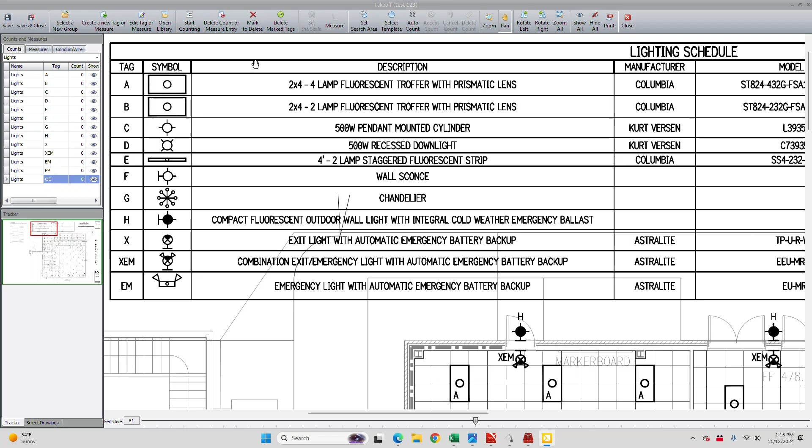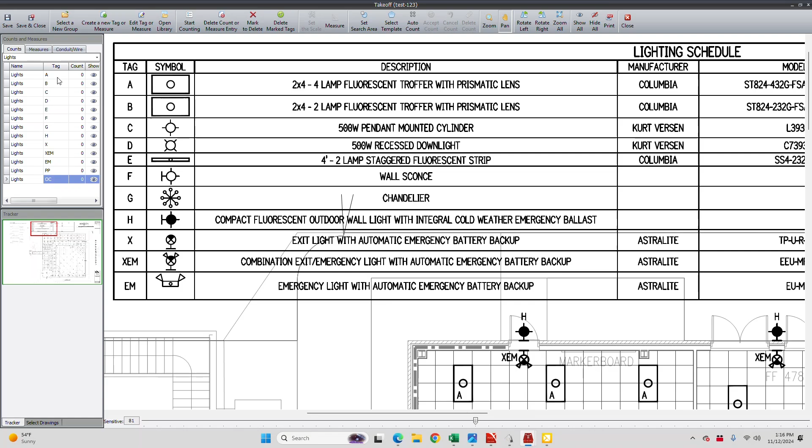The first thing I like to do is find the lighting schedule. A lot of people are confused about this, but it's just a schedule with what we refer to as tags. The tags just tell you what fixture you're going to be using for that tag. So we'll transfer these tags, A through EM, over to the tag machine right here. This is going to be your count and measurement viewer.

It's that simple, just transfer those tags, and anybody can do this. There's no faster estimating software on the market than the Best Bid, either the Hybrid or the Next Generation. They're both fantastic products, and I'm not going to count every fixture here.

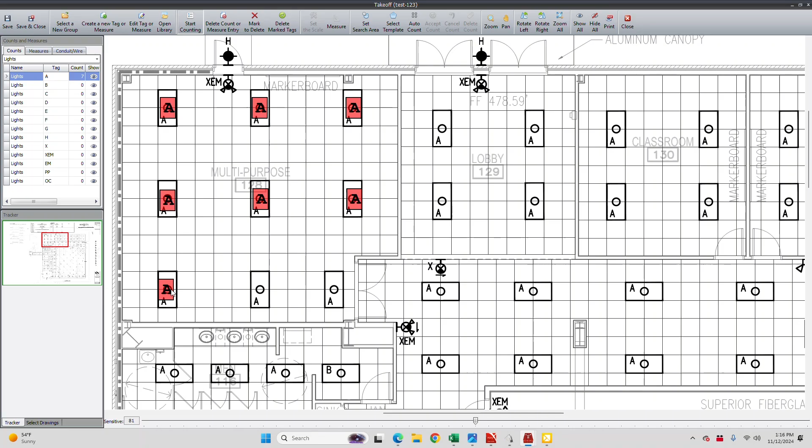It's just so simple to do. We're going to hit a button that says start counting. We'll highlight a fixture and you simply click A. It's that simple. If its color is counted, what I like to do is just get a view that I'm comfortable with, and I count everything in that view. I don't go around searching for all the A's, I just simply count it if it's in the view I'm looking at.

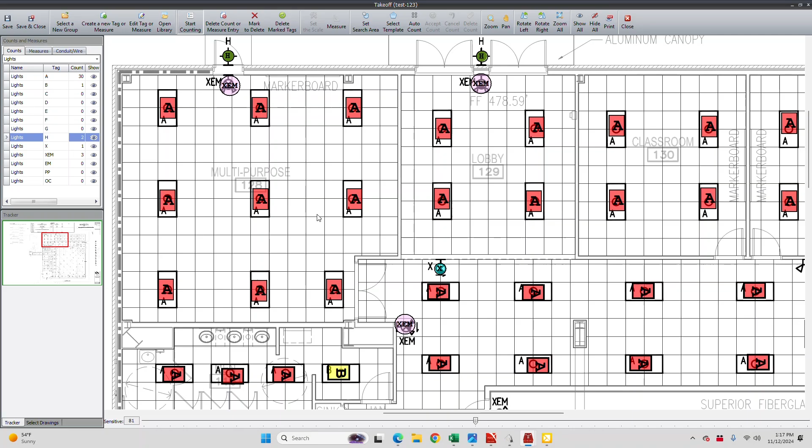It's very repetitive, like I said, anybody can do this. So we got an X, and an XEM, and an H. Everything is counted in that view. I just simply scroll to the next view and repeat the same steps.

You don't have to be an electrician to do this, anybody can count. It just keeps a cumulative count of every time you click.

But the beauty of the Best Bid software is not only how easy it is to count, but it's how you transfer your information once you're finished.

Also the beauty of this product is, as we're on this takeoff screen, I can see that these C fixtures are over pews, probably 30 feet in the air. So I'm going to adjust the difficulty factor for these.

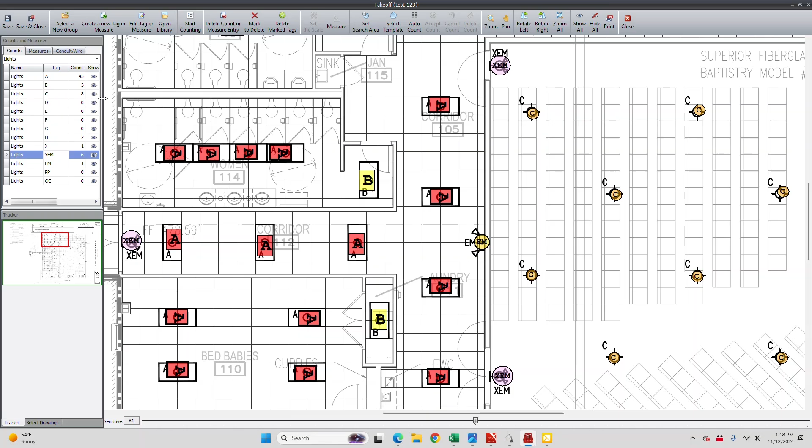If you leave the man hours at 0, it's going to give you your default. But I'm going to change these particular fixtures to 2 man hours, since they're going to be done in a lift. The others I'll just leave as they are.

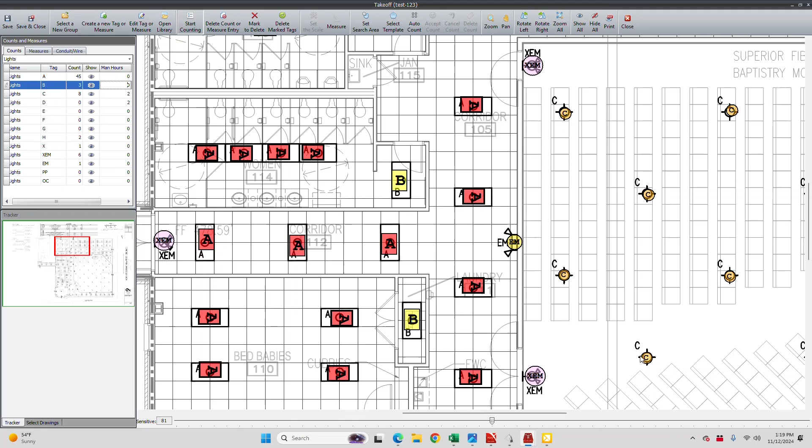Now that I'm finished with these counts, I've counted my entire lighting project. All I do is hit save and close, go to the lighting assembly, create a new assembly, add multiple counts. All I want to do is highlight all of them.

I didn't count them all, but I'm going to bring them all in. Hit OK, now they're in the estimate. Nothing can be simpler than that.

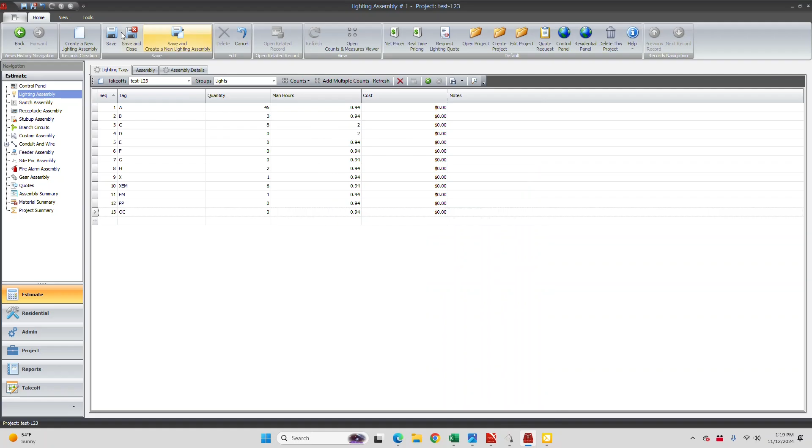Going to hit save and assembly details to see my results. So this is going to be all the boxes, conduit, couplings, connectors, seismic hangers, fixture installation, everything you need to do those fixtures. If you want to make changes, you go to the assembly button.

From here, you can change everything about any fixture: the strap type, the couplings, connectors, everything about it. The labor, you can change if you want flex, you hit add fixture whip. Raceway size, if you want a different size, just choose it. You want a different type, you want to go to MC cable. Everything's adaptable, everything's changeable, nothing faster, nothing easier.

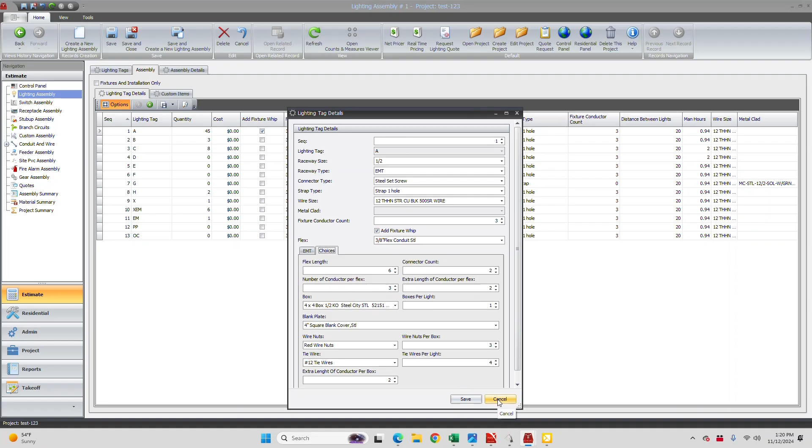You can even open up the option screen and go deep into changing everything about what's happening, but most of the time you want to just leave it alone. If the whole thing needs a difficulty factor, you can raise this difficulty from 80 to whatever you feel it needs to be.

Next, we're going to go back and start measuring. Okay, I've gone back and colored and counted all the fixtures in the drawing. I know you didn't want to sit there and watch me do that. It's pretty repetitive, but I now have everything counted.

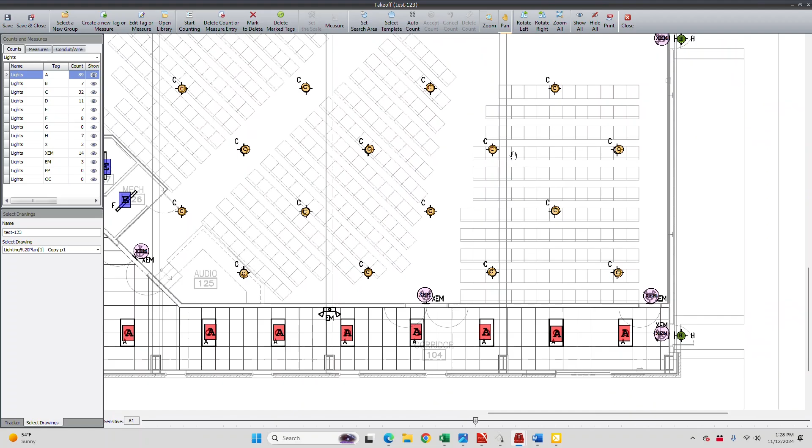Actually, I missed this EM. I was just kind of in a hurry, but it's easy to fix your mistake there. So everything is counted, everything's ready.

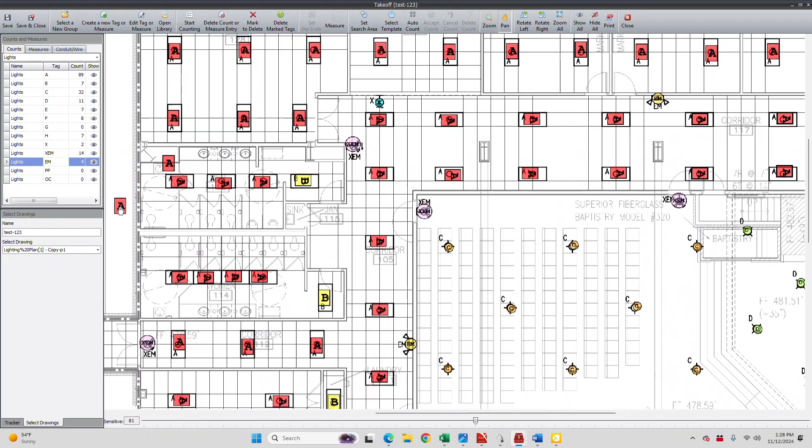Here's a mistake I put out here on purpose to show you how you would remove that. You put the X on it and click delete, that removes it. So now we have everything recorded.

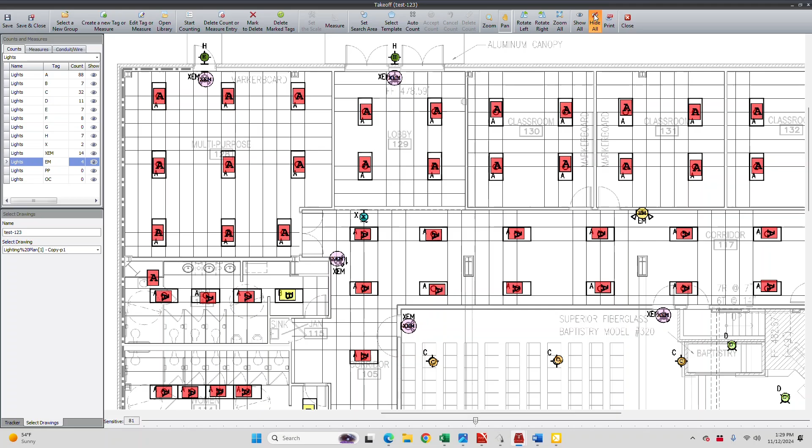The next thing you want to do is hide all the counts. Now I'm going to bring in a plan with the circuitry on it, and get the perfect view.

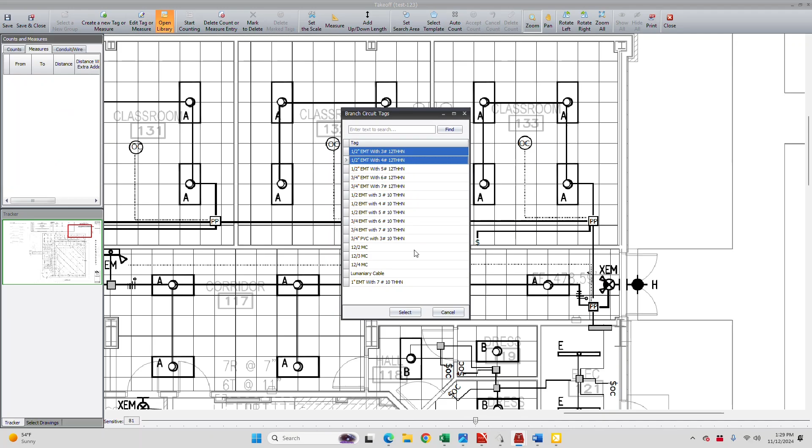I'm going to go to measure, open up the tag library. I'm only going to enter the top couple of items, which you could enter them all. This is going to be half inch with 3 number 12s, and half inch with 4 number 12s.

To measure, you just simply set the scale. I know this fixture is 4 foot.

I'm also going to add another one, which I just saw, which was going to be low voltage. I see some OC sensors here. So we will start with the half inch with 3. This should be pretty simple to do.

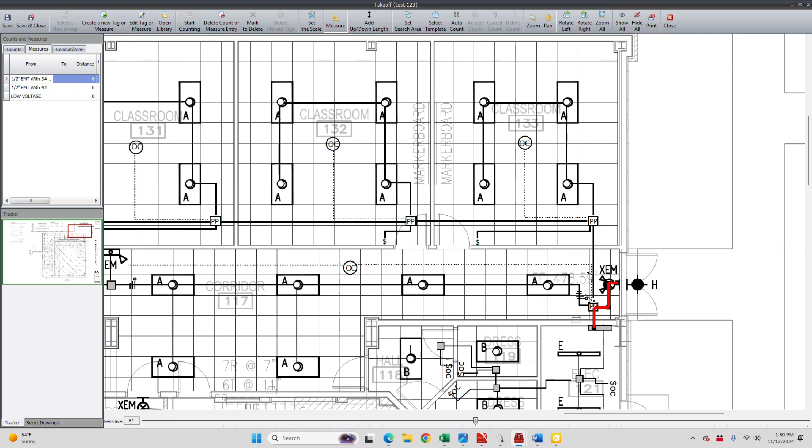So we're going to start measuring. We'll go from the panel to the power point, to the power pack. Now, this is not meant to be pretty, it's just meant to completely catch your conduit so you have a better guess than just guessing. So I'm just going to follow the lines. Again, this is simple to do as well.

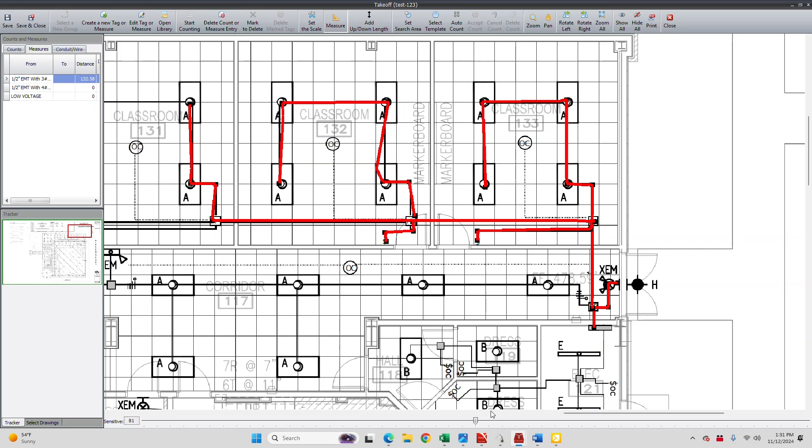I think you can understand what we're doing. We're just catching all of the circuitry that has hot, neutral, and ground. We're going to the power pack, and then we're running switch legs.

Now we're going to address going down to these switches at a later part of this video. Well, I guess I'll go ahead and do it now. If I wanted to go down to this switch and catch the down mark, I would go to add up and down, click one time, and then take it off. That accounts for going down the wall to that switch. But there's another way, an easier way of accounting for that, and I'll show you later on.

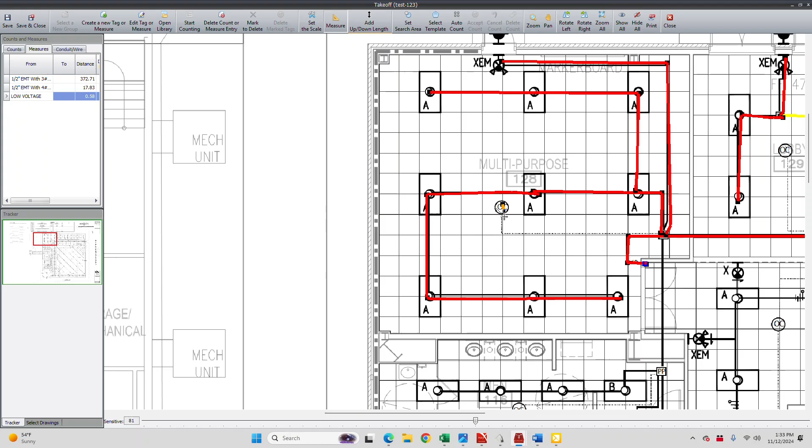Now I'm going to catch this low voltage wire going to this occ sensor. And while I'm catching them, I'll go ahead and catch these others.

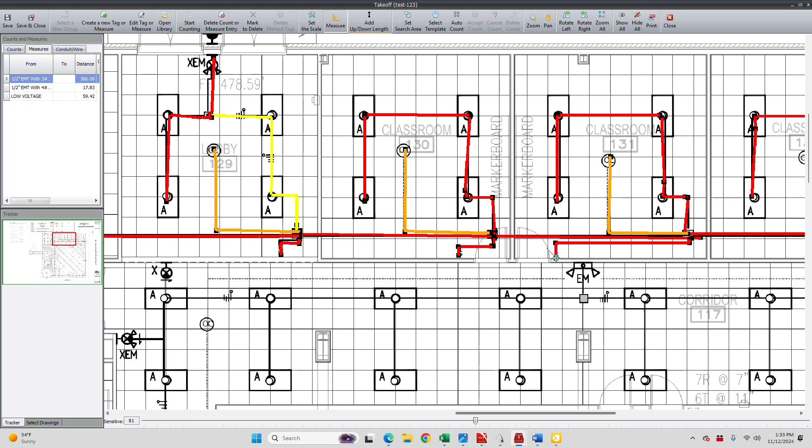When I catch this switch leg here, I can do this much, much faster if I'm not trying to tell you how to do it. But that's just the way it works.

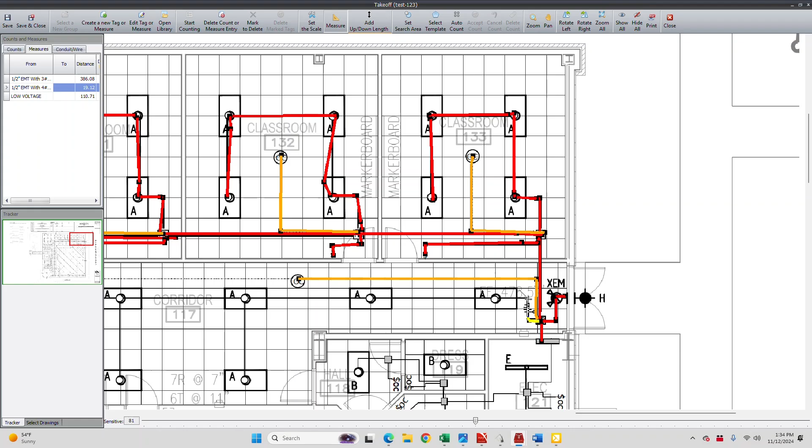So we're going to go 4 wires down this corridor, and then I assume we'll go 4 wires down this corridor. And then we'll go back to 3 wires to catch the emergency lights and the fixtures that don't require the emergency part of the circuit.

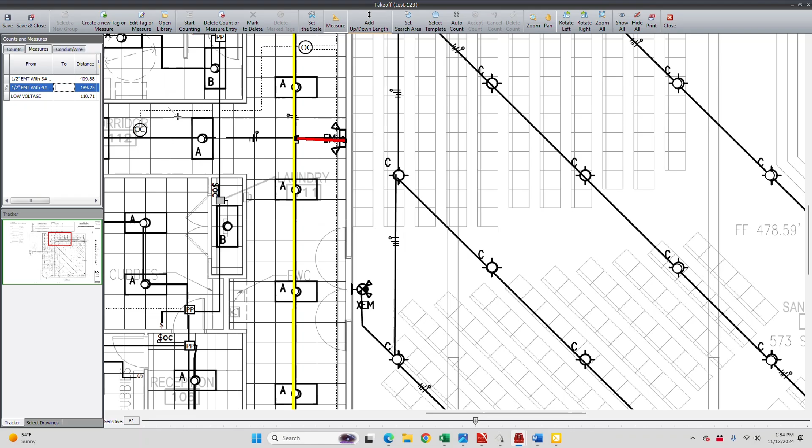You see, we'll go back to 4 wires down here. I think you get the idea of what I'm doing. It's pretty repetitive and pretty simple. You do not have to follow exactly the way that I'm doing this, but I'm just following the way it's laid out on the drawings.

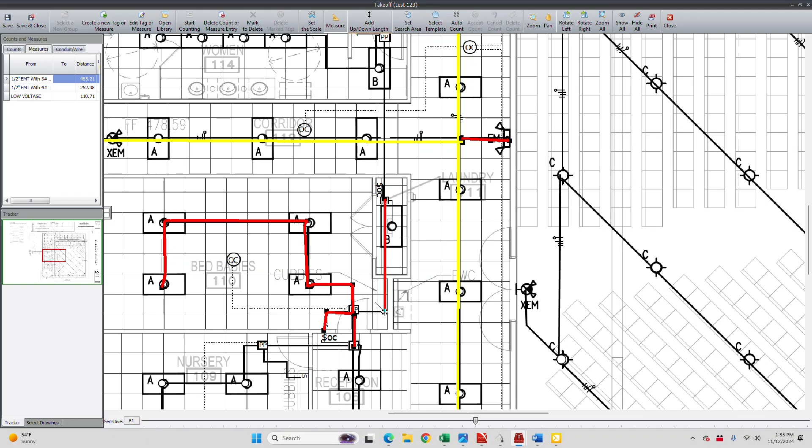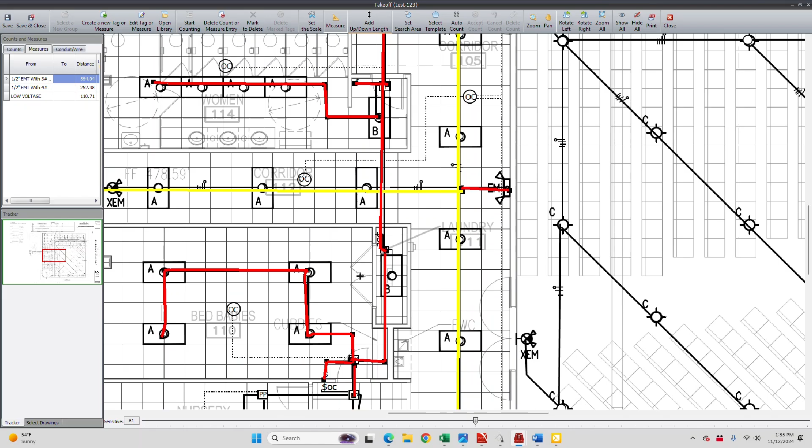It's pretty simple. You can do it really quickly. But the beauty again of this is how do you transfer all this footage to the measurement? That's to the estimate. That's what the beauty is. That's how easy it is. So I'm going to show you that in just a minute.

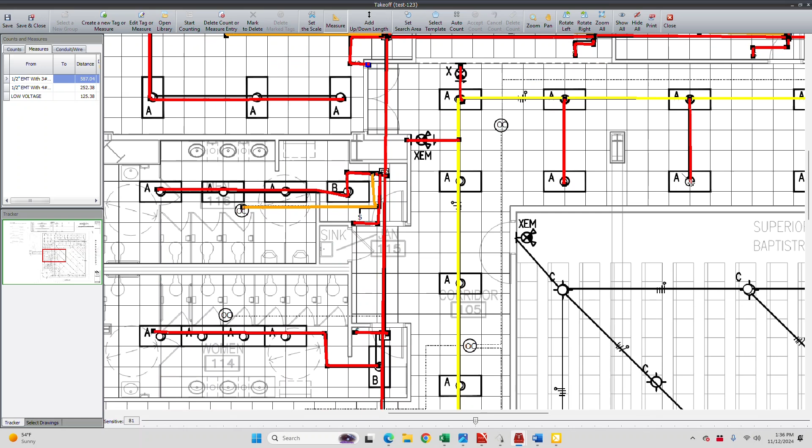I'm going to catch just a few more things. Catch this hallway. I'm going to stop right here, pause the video, and go ahead and finish doing the count, and I'll be seeing you in just a second.

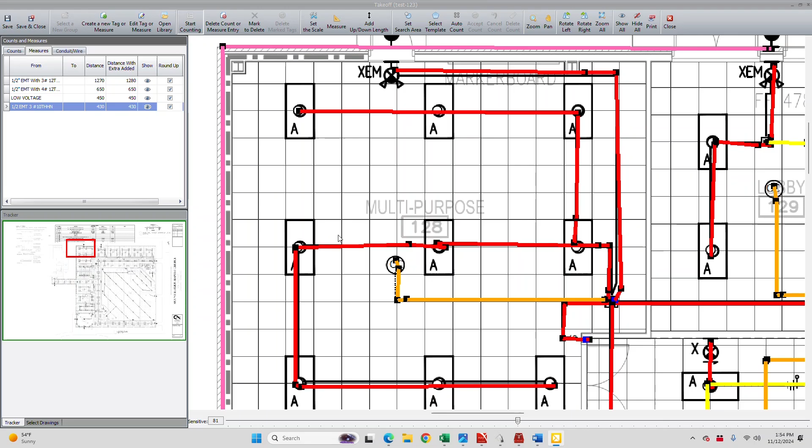Okay, so I've been back and counted all the runs of this conduit. It didn't take hardly any time at all, and I have everything recorded. So I'm going to go back and show you how to transfer this over to the estimating side of the software.

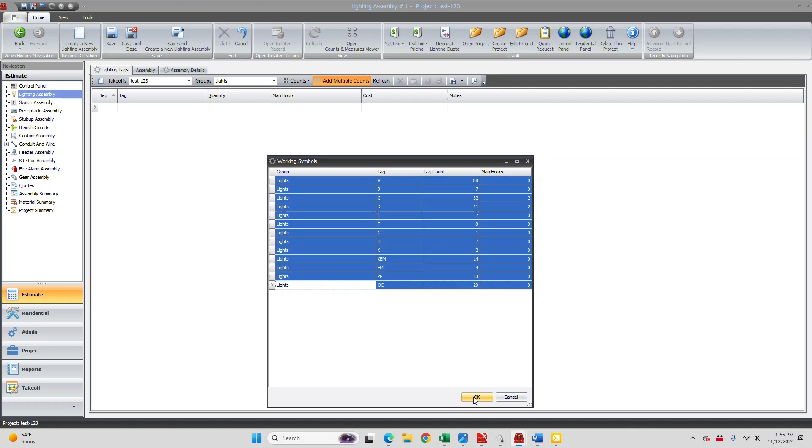You just save and close. We're going to go back, do the lighting one more time. Add multiple counts. I've completed these counts, so now we will just highlight them all. Save and close.

So now I'm going to go to the branch circuits, create a new one. I'm going to open up these tag menus. From here, all I have to do to enter these is transfer this count: 1280, hit complete. 650, hit complete. And I added one for those outside lights, 430 for 3 number 10s.

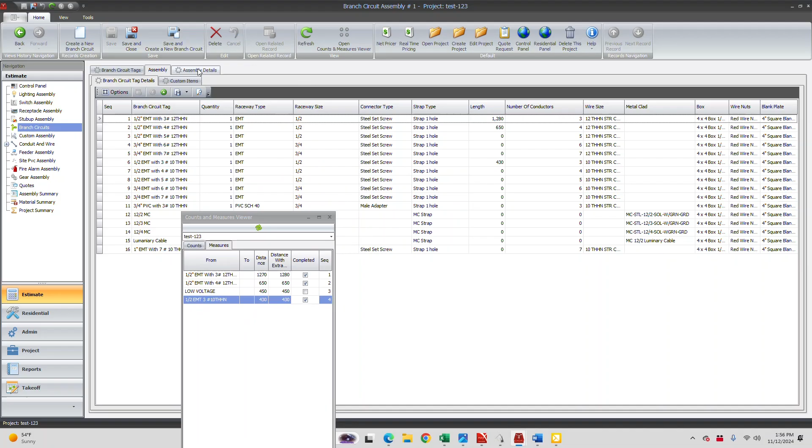So that's all it is to completely enter all your lighting branch. I'd come over here and just call this the lighting branch circuit. Anytime you make a change, you just simply hit save, and that's everything you need.

Now, at this point, we're sort of double dipping because on the lighting assembly we have a distance apart. And since I scaled this distance apart, I wouldn't need to use this, so I don't need to use this.

But I'm just going to see how close the averaging would have been if I chose to set this at like 11. Looks like a good 11 foot apart. Let's just glance and see. So that's 2,354 foot of conduit just by quickly averaging.

And let's go to the branch. 1,280... 2,360 foot. So it's just literally a few feet difference between averaging it and scaling it.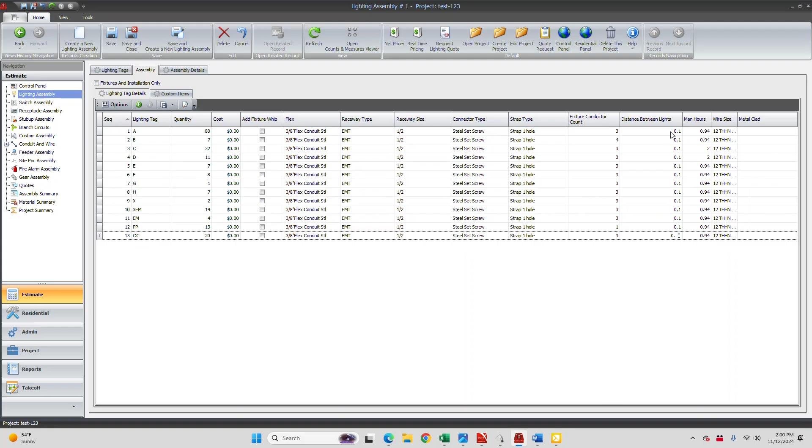Save and assembly details. That way it just brings in all my boxes and everything, and maybe just a little bit of fluff, but not really enough to make any difference. So I've only added like 20 foot of conduit.

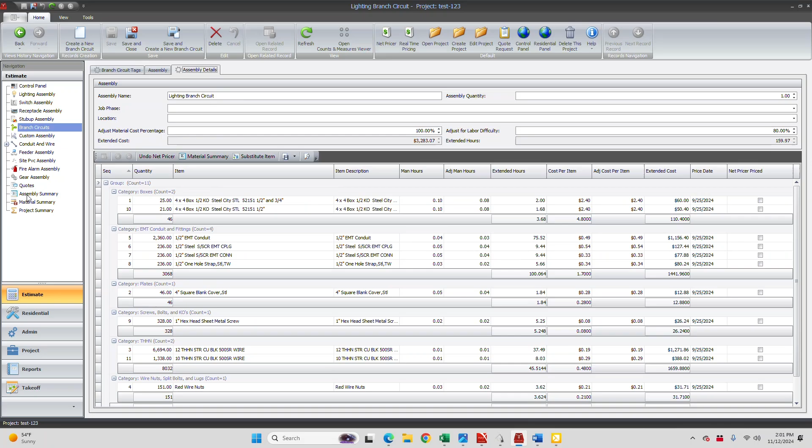So now we have all the lights entered and all the branch circuits for the lights. So there's our lighting branch circuit. On the assembly summary, you're going to be able to see there's our lighting branch, there's the extended cost, man hours, which does not include the fixtures itself.

I'm telling you, anybody can use this software. It's the fastest software on the market. I literally could have done this in just a very, very few minutes if I wasn't explaining it to you. It's very simple. Just give us a call. Let me show you exactly how it works.